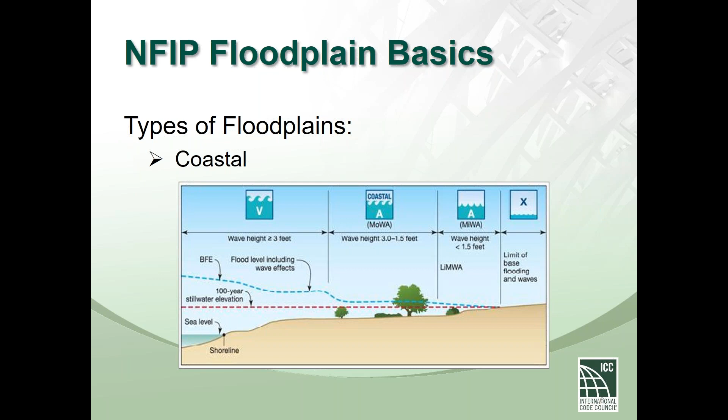Within each of the floodplains, there are different types of flood zones. The common flood zone is X, which means it is not susceptible to, or it is not expected to flood within the 1% in 100 years.

X, however, does not mean that it will not flood. With the storms that we have seen over the last few years, we have areas that historically never experienced flooding that in the wake of these storms did experience flooding.

The common areas that are anticipated to see floodwaters are the A zones and the V zones. The A zone is going to be most closely associated with the coastal areas. The water depths in an A zone can range anywhere from 0 to 36 inches deep. And then the coastal A, which is going to be along the coastline itself, traditionally the water depths are going to range between 18 and 36 inches.

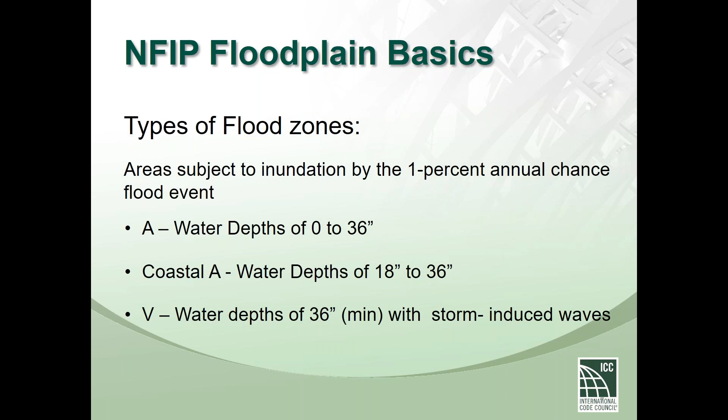On the coastal areas, however, once the water depth gets in excess of 36 inches, these are typically identified as V zones, and the V actually stands for velocity, meaning that as the water is coming in, it's basically surge. It's going to have velocity associated with it and energy, and it's going to do a substantial amount of damage.

The actual locations of these zones can be found on the flood insurance rate maps, or the FIRMs. The flood insurance rate maps are produced by FEMA and are made available online at no cost through FEMA's Map Center. You can simply go in, pull up your property address and identify the flood zones within your area.

Now, it is important to note that not every area within the U.S. has been mapped, whereas other areas have several iterations of maps. The greatest iteration having recently occurred was due to the change in the vertical datum.

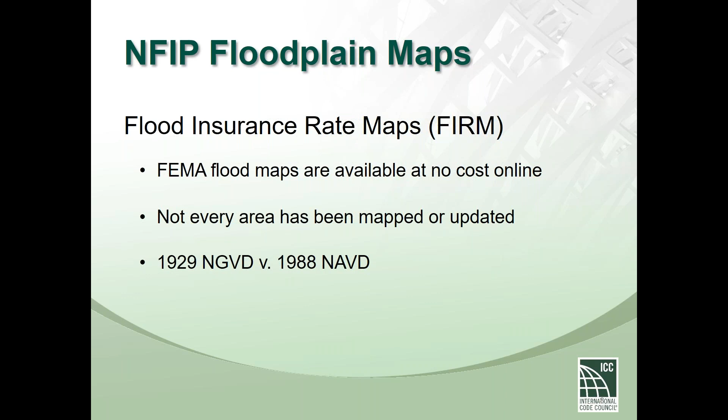When the maps were originally created in the late 70s and early 80s, they were based on the 1929 vertical datum. That datum, however, has been revised, and the maps are in the process of being revised, some of them for the second time or more. And the new vertical datum is based on the 1988 or the 1989 vertical datum.

On this slide, you see an example of a map that was created through FEMA's website. Simply by going into the Map Center, entering the address, you can pull up the location of the physical property. In this particular case, you see the location is in an area on the page that is white. That indicates that it is inside of an X flood zone.

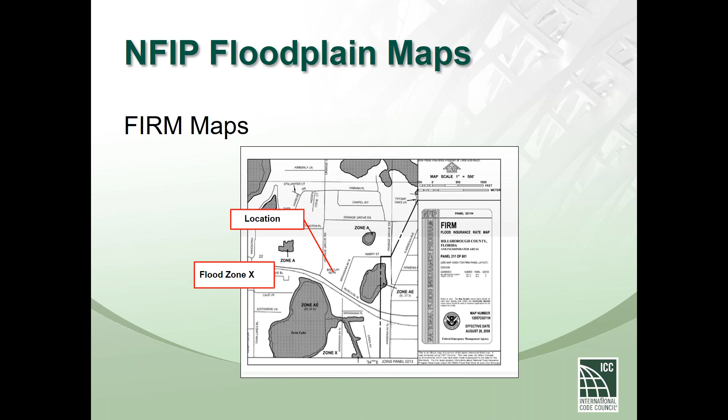And the dark shaded areas surrounding it are designated as either an A or an AE. The only difference between an A and an AE, the E standing for established, meaning that the depth of the flood waters have been established based on historical data and or hydrologic maps.

Now, one of the more important components of this is the vertical datum. The elevation certificate form that this slide talks about is a form that was created so as to capture basic elevation information, especially on structures within the flood zone, so as to establish whether that structure is subject to flooding or not.

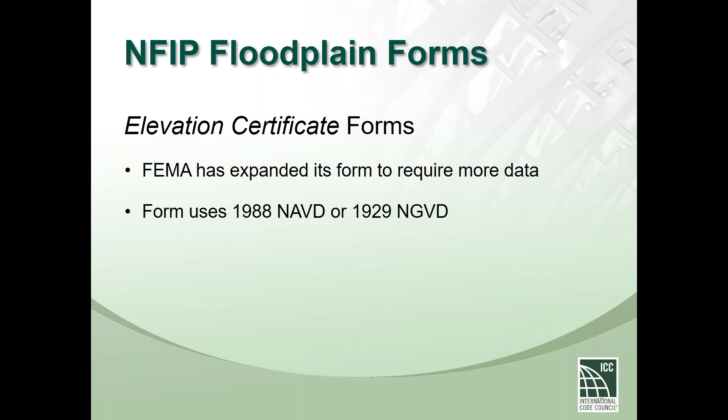The form has been expanded over time, and when navigating the form, it is actually very important to know whether you are on the 1929 or the 1988 vertical datum.

On this slide, you see a screenshot of the form itself, and just to point out a couple of areas worth noting, in the upper right-hand corner, you see that the horizontal datum information is found and is to be provided on the form. There were also two horizontal datums established, so it's important to know which one you're using there.

This has perhaps less to do with the likelihood of flooding and is used by many jurisdictions when establishing or verifying tie-in at the time the foundation is being placed. Below that is where you see the vertical datum information that is to be provided, with an indication as to which vertical datum it's based on.

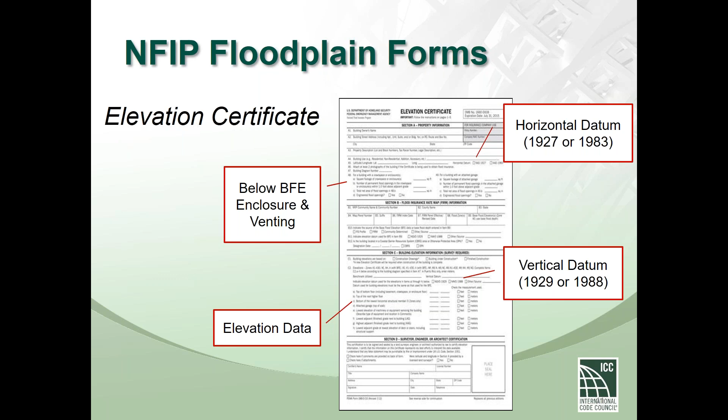On the upper left-hand corner, there is information on this form that is to be entered with respect to structures, enclosures, and venting of any enclosures that fall below the base flood elevation. And then finally down below is elevation data, with respect to different features and aspects of the structure.

Now, floodplain management has been around for a while, and historically, floodplain management was enforced through ordinances, modeled after the National Flood Insurance Program.

Floodplain management, however, is more than just buildings. Floodplain management is the management of construction and construction activities within the floodplains. Basically, anytime we build in a floodplain or add something to it, the water depths could potentially be increased as a result of that space being occupied. So floodplain management is just managing the growth.

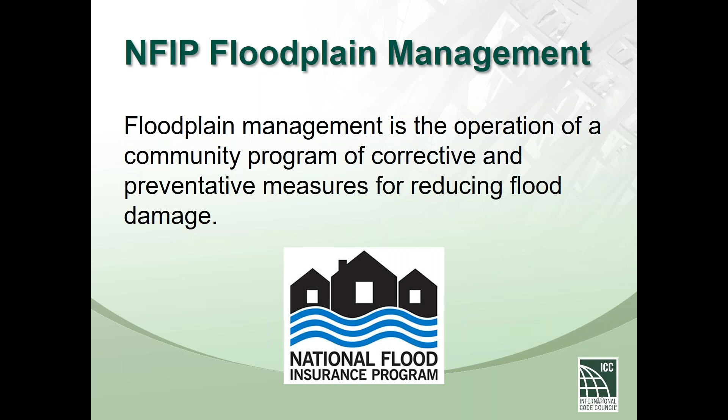Now, what happened is, as part of floodplain management, there were development concerns and building concerns. Starting with the 2003 and 2006 International Building Codes, the building provisions from the NFIP, the National Flood Insurance Program, were moved into the building codes. Initially they were put in the appendices, and then starting with the 2009 and 2012 codes, they were moved into the body of the code itself.

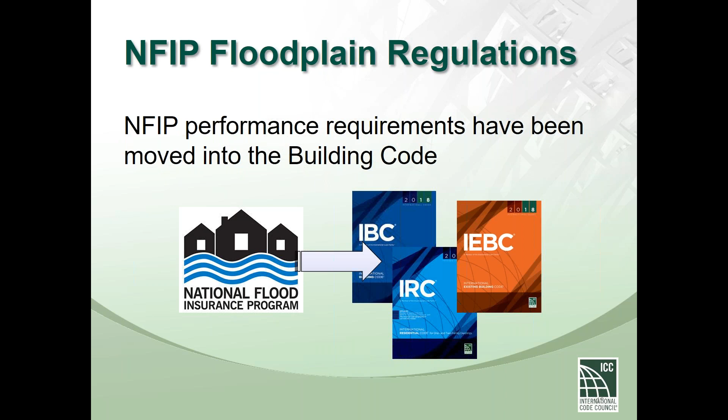In addition to the building requirements having been moved from the NFIP into the building codes, we also have additional requirements found within ASCE 24. I'll talk about ASCE 24 in more detail later in the talk, but basically the building code sets the prescriptive requirements, and ASCE 24 provides the methods with which one accomplishes those requirements.

Now, getting into some of the provisions found within the building codes and ASCE 24, we'll start with some terms that were introduced into the building code by the addition of the building requirements from the NFIP. One of the first terms critical to this entire program is the BFE, or base flood elevation. Simply put, the base flood elevation is the depth that the waters within the flood zone are anticipated to rise to.

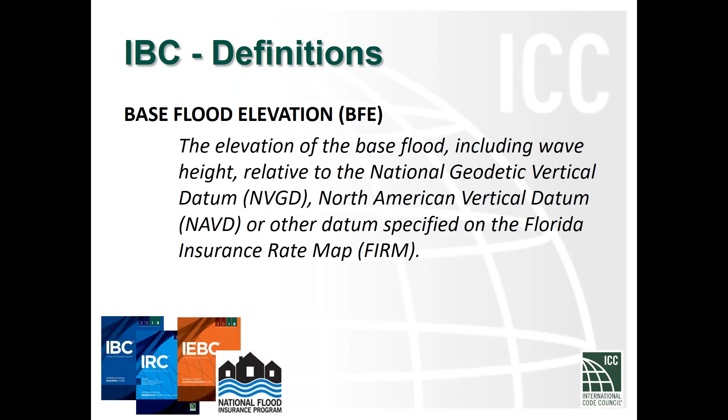As I said, this is based on historical information and hydrological models. The base flood elevation is also the minimum elevation, so anything below the BFE within a flood zone is anticipated to flood.

In addition to the BFE, we have the DFE, or the design flood elevation. The design flood elevation is the elevation that, when building new, we are to build to. So the difference between the base flood elevation and the design flood elevation is something called freeboard, the additional height we are to add to the base flood elevation. So if I'm designing a structure in an area with a base flood elevation of 10, and my code or municipality requires a freeboard of 2 feet, then the finished floor elevation is to be built to 12.

So base flood is, if you will, the elevation that the water is to rise to, and the design flood is the elevation that I am to build to.

One item worth noting: in the International Building Code, that freeboard I just referenced points to ASCE 24, because within ASCE 24 you have tables that provide values based on the type of structure and where it's located, specifying just how much freeboard will be required.

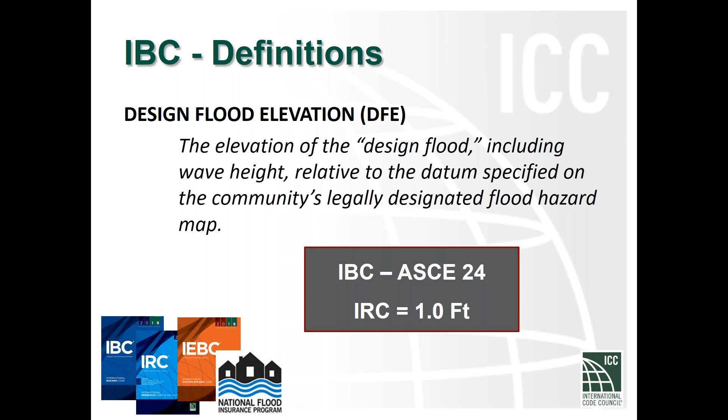Whereas in the International Residential Code, that freeboard requirement has been set to 1 foot. Now, some municipalities actually require more than 1 foot, which has created some challenges. To the design professional, it's always worth noting that you need to check with the authority having jurisdiction to establish or verify what the freeboard requirements are.

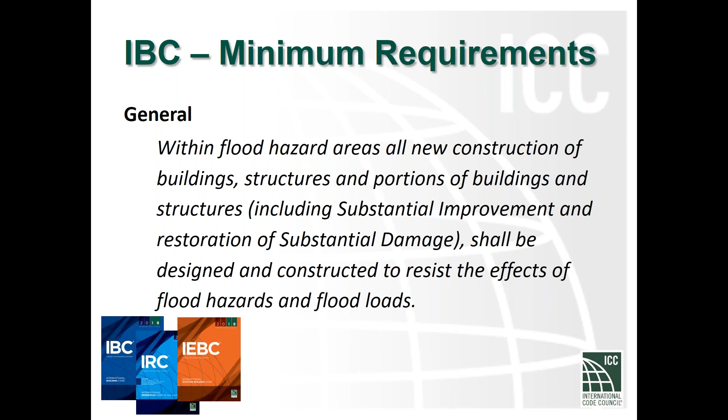Now, one of the other items we're going to talk about, one of the more significant additions made to the building code with the introduction of the NFIP requirements, is the dealing with existing buildings, or the substantial improvement, substantial damage rule. We'll talk about that in just a second.

Flood hazard documentation. In addition to terms that were added, there were additional requirements put into the code, requirements placed on design professionals, basically setting minimum amounts or types of information that the design professional is to include in their permits or plans, so as to demonstrate that the design has contemplated and met these flood requirements.

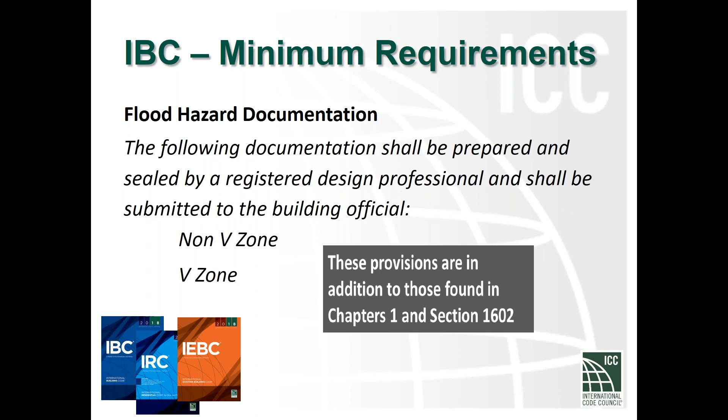Within the code itself, you'll see these requirements referred to as V-zone requirements and non-V-zone requirements. At the end of this first part of the talk we'll discuss some of the differences, but in a V-zone requirement, that is in the coastal area where I'm going to see surge and the depth of water is going to exceed 36 inches. The non-V zone could be anything from a coastal A to an inland A, and the water might be rising only on the order of inches. There are differences, and the code differentiates between the two.

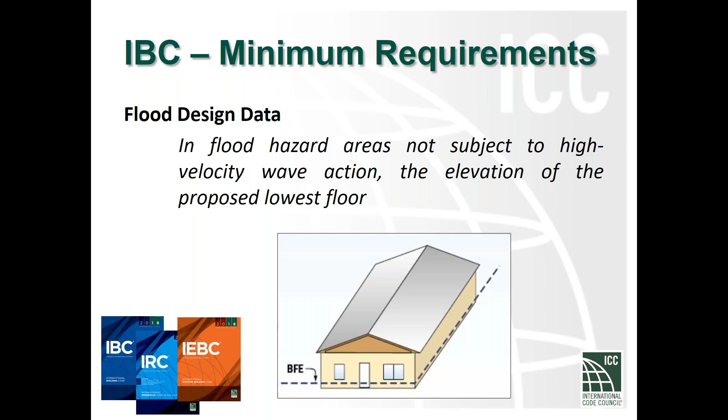An example, with respect to additional information to be provided on the plans by the design professional: if I am dealing with a structure in a flood zone, in an inland A for example, my requirement is that my finished floor be at or above the design flood elevation. So on my plans, I need to provide the ground elevation, the depth of the A zone, and then the elevation of the floor slab itself.

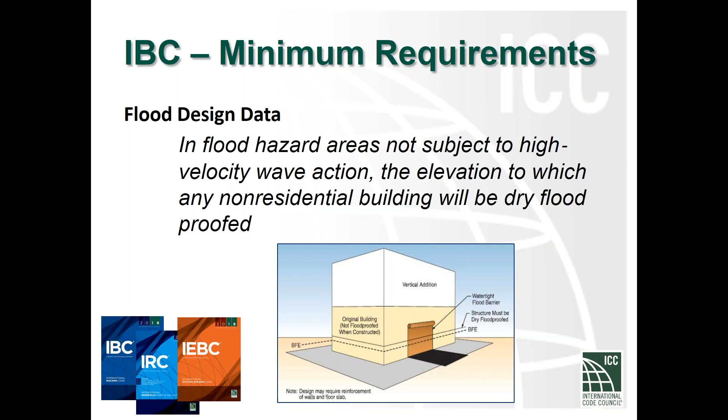If I have an existing building, I can dry flood proof it, meaning keeping the water out. There are requirements that have to be met with respect to hydrostatic loads on the method I'm using to keep the water out, and measures that have to be taken to anchor the structure against any floating. This information has to be provided in the plans and permits submitted to the authority having jurisdiction.

And then finally, an example of information that has to be provided when dealing with a structure in a V zone. V zones being very different. With the A zone, the object is to get the finished floor above the anticipated elevation of the floodwater, whereas in a V zone, the goal is to get not only the surface of my finished floor, but all of my horizontal structural components up and out of the water, so that when the surge comes in, it is not impacting any horizontal structural members.

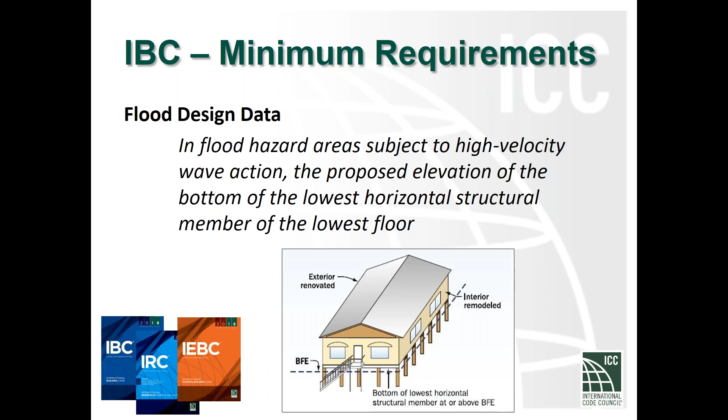So in this particular case, when dealing with a structure in a V zone, the information that has to be provided on the plans would include not only the ground elevation and the depth according to the flood zone maps of the water, but the elevation of the bottom of the lowest horizontal structural member, so as to verify that all of these components are up and out of harm's way.

Moving on, I said we would come back to this one, more specifically with respect to this talk, and you're going to hear a lot more about this type of structure from both Rod and Tom. But to introduce how the code handles it: when we have an existing structure found in a floodplain and the finished floor elevation is below the base flood elevation, meaning it is subject to flooding, when that structure is damaged or improved for whatever reason, whether fire, wind, or flood, when that property owner is considering repairing or improving that structure...

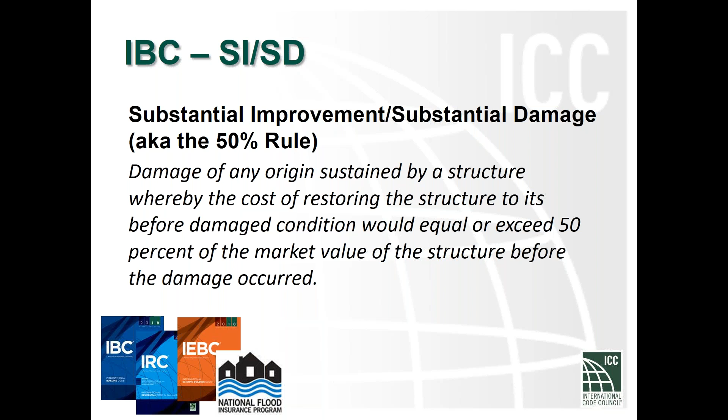...if the cost of those repairs or improvements exceeds 50% of the value of the building, then you have what's called a substantial improvement or substantial damage. The significance being, once that level of improvement or repair to damage has been committed to, that structure is required to comply with the flood provisions of the building code, meaning the finished floor has to be elevated to the DFE, or design flood elevation.

Now, there are some basic steps, and what you see on this slide is a flow chart of those questions I just ran through. Just to use this flow chart, when determining if my structure needs to be elevated or lifted, the first question is the cost of the repair or the improvement: does that exceed 50% of the value of just the building, not including the land, but just the building itself?

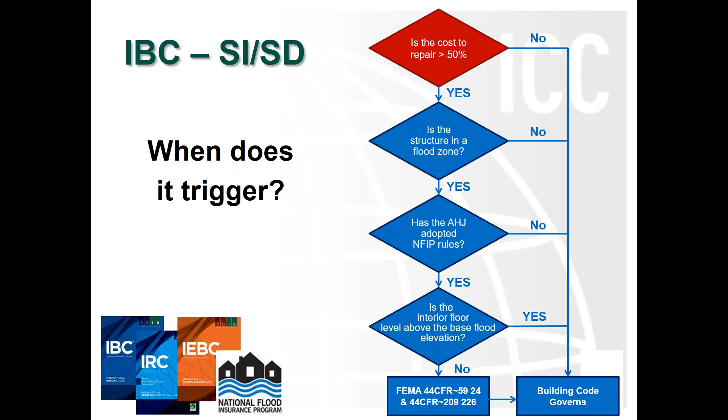If it does, is that structure in a flood zone? If it is, has the authority having jurisdiction adopted floodplain regulations and or the building code that would require an evaluation for substantial damage, substantial improvement? And then finally, is the interior floor above or below the base flood elevation? If you get down through all of this and the answer is yes, then what you're facing is lifting or elevating that structure so as to bring it into compliance with the flood regulations.

Now, to emphasize, when I have a substantially damaged structure or a substantially improved structure, and I have to elevate that structure, what the code says is that I elevate that structure and bring it into compliance with the flood provisions, not the entire code. The point here being, you can take an existing structure and elevate it without having to bring every aspect of that existing structure into full compliance with current code.

When I have a structure that is non-firm compliant, meaning the finished floor elevation is below the base flood, but whatever I'm doing—improving or repairing—does not exceed 50% of the building's value, then I have what's called a non-SISD. In this case, the code does not require me to elevate that structure, but it does recommend that measures be taken to protect utilities and items that can be protected.

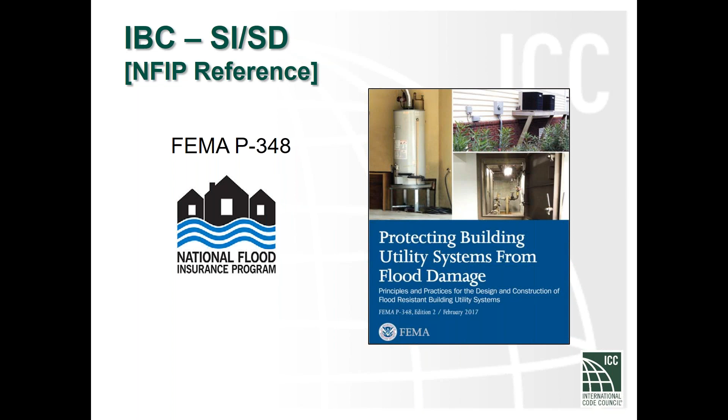Another example is FEMA P348. This is a guide put together on how to protect utilities, both through elevation and wet floodproofing means, so as to minimize or mitigate any future damages or the extent of any future damages.

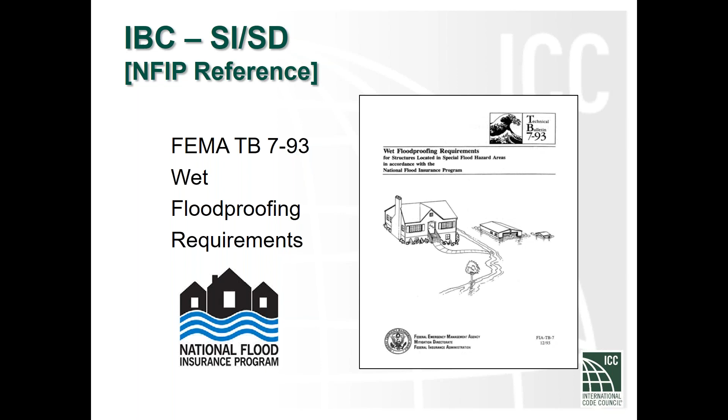And again, another example: this is FEMA's Technical Bulletin 7, produced originally in '93, that provides guidance on how to wet floodproof a structure. What wet floodproofing means is we're going to allow the water to come in, but we're going to protect those portions of the structure or those utilities within the structure from damage.

Without getting into a great deal of detail, ASCE 24 is the guide that the building code points to and directs design professionals to on how to complete, design, or comply with the requirements found in the building code. Within ASCE 24, you'll find tables providing basic freeboard requirements, how to design breakaway walls, how to design foundations, and the like.

So some examples, and I'll wrap up with this—just some examples taken from both the code and ASCE 24, also highlighting some differences between A-zone construction and V-zone construction.

Starting with A-zone construction: if I'm building a structure within an A-zone, what the code requires is that I have my interior finished floor elevation at or above the design flood elevation. The design flood elevation is based on the base flood elevation for that area, plus whatever the freeboard requirements are. Here, within an A zone, ASCE table 2-1 provides the various freeboard requirements recommended by ASCE.

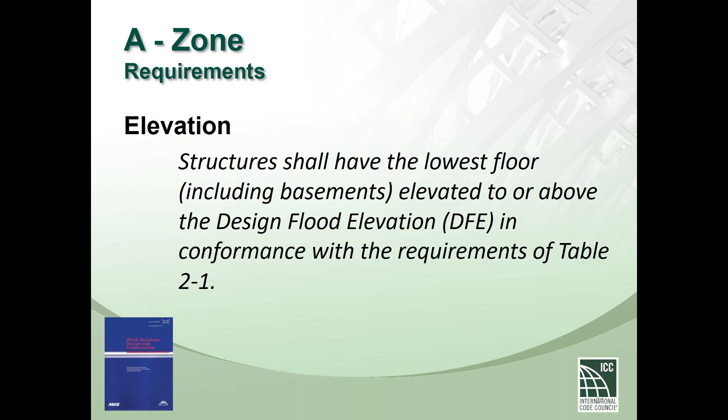Some other examples: within an A zone, structural fill is permitted, but is limited to the building footprint. That means I can build a structure on grade, bringing in fill soils to build on grade in an A zone. Some requirements are attached, such as the bottom of my footing needing to be below any estimated scour that may occur, but I am permitted to do that. The fill is limited to the footprint of the building, and the thinking is that we want to minimize the impact on the floodplain, thereby reducing the amount of further elevation of the water as a result of us occupying that space.

In addition, any enclosure below the design flood elevation is required to have flood openings, and you're going to hear more about that from Tom. Here's an example, and Tom will give you some great pictorial examples.

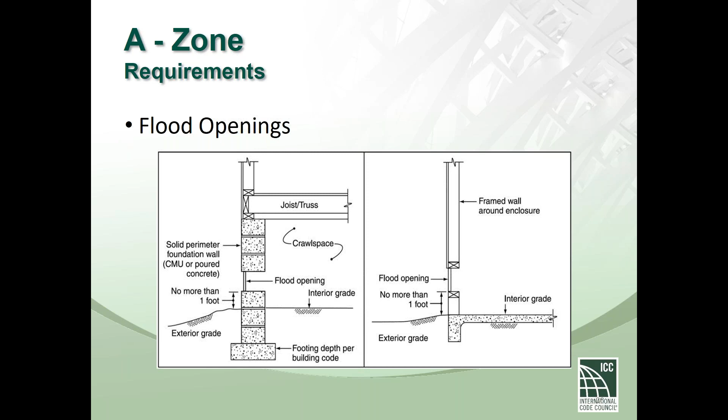On the left, you see a crawl space with a vented opening. There are requirements on the size, location, and how these openings are to perform. Basically, the code says if you're going to build a structure, the water has to be able to flow freely in, around, and through the footprint of that building without damaging it. On the right, you see an example of a garage floor slab that is below the design flood elevation, therein requiring that it be vented as well.

And then finally, to wrap up with, by way of comparison, in the V zones. In a V zone, as I said earlier, our concern is not the finished floor elevation. Our concern is the horizontal structural members, and we want all of them up and out of the water. So we take the estimated flood depth, add the freeboard requirement, and that is where we begin building up from.

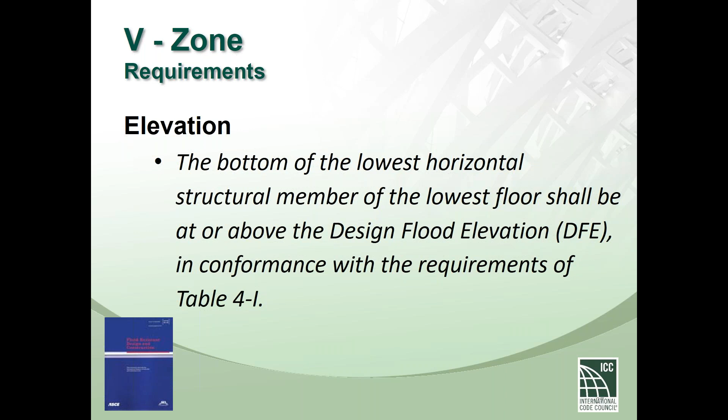In V zones, because we're going to have water coming in, and it's anticipated we'll see scour and erosion of the soils, structural fill is prohibited. In fact, only piled foundations, deeper piled foundations, are permitted. That way, when the water comes in and washes back out, pulling the soils with it, it should not affect the structure, thereby leaving the structure standing.

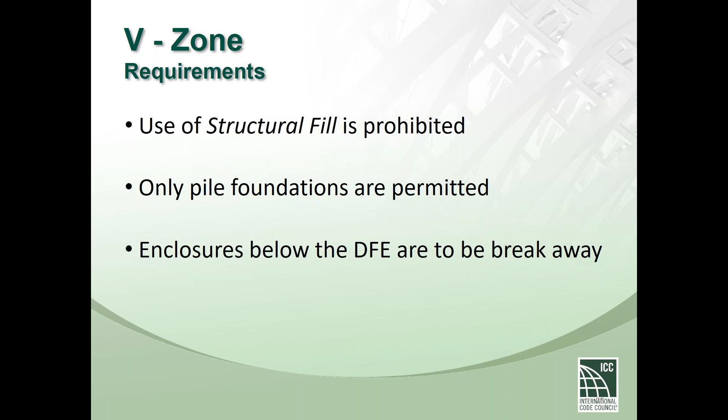But because we're going to have these floodwaters coming in underneath the structure, any walls down below my horizontal structural members are required to be breakaway. And any slabs on grade are required to be friable, meaning that they can break up and fall away without causing any damage to the structure.

So I submit that to you as an introduction of the floodplain, the rules, what's in the code, and ASCE 24. And at this point, I will give it back to Kelly so that we can continue on.

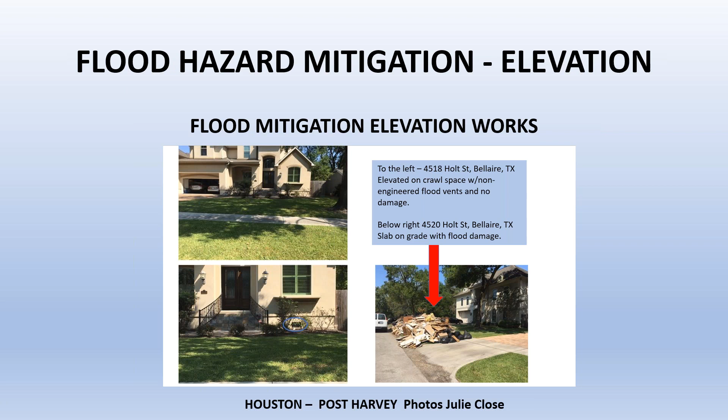So it's something we can stop, break the cycle of repeated flooding, and that's what this is all about. So elevation works. It works on so many different levels. Just released at the end of last year, they've upped the ante on the savings for flood mitigation. Now it saves $6 for every dollar spent in disaster recovery costs.

It also preserves property resale values. Elevated structures in the flood zone have excellent resale values, which is very important because resale values correspond to tax revenues, which keep everything running in our communities. Remember, 50 cents out of every property tax dollar goes to local schools, and the rest is spread out amongst public safety, sewers, roads, and as we are required to do more resiliency activities with elevating roads and helping make the stormwater and sewer systems and water systems resilient, you are going to need a strong tax revenue base. In Texas, like Florida, this is very important because there's no income tax, everything runs off of property taxes.

So very important to do that. Non-elevated structures with increasing flood insurance are losing value every year. It also greatly reduces the solid waste stream to the landfill from both demolition and disaster debris removal.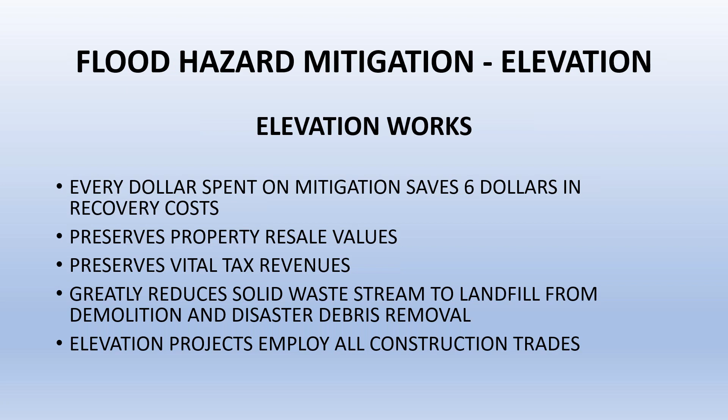All right, let's look at the equipment that we use. We have some very specialized equipment and some very highly trained personnel in our very specialized industry.

This is a unified hydraulic jacking system. It's recommended to be used on all elevation projects except for garages and sheds. This machine is an evolution of over 50 years of product development. It's built like a tank—you basically just overhaul it every so often, and it works for 50, 60, 80 years. There's not a lot of built-in obsolescence. So basically it's about $100K investment into the machine.

Then we have hydraulic hoses, jacks, cribbing, steel, tools. You see 2 crew trucks right here with trailers. By the time we show up to the property owner's front door, it's about 250 grand invested in crew, equipment, and insurance. So it is a very capital intensive investment, and very labor intensive work. We're very proud of the people in our industry and of our safety records. This is some very specialized equipment.

What this does is create a simultaneous lift. Each one of those dial gauges is a port on the machine, going out with a big hydraulic hose to a jack. They set all the weights—you can have different weights on the building, a fireplace at one end and a wood frame addition on the other—and you can lift the whole structure simultaneously by unifying all of those jacks in a single handle push, actuating all of the jacks simultaneously.

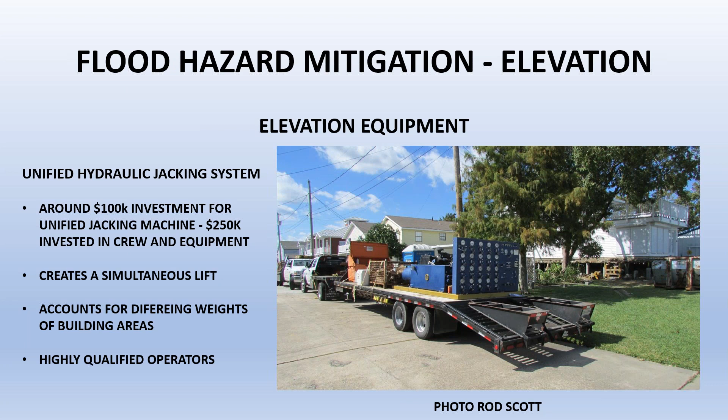It is the least aggressive method on a structure. Remember, no structure was ever built to be elevated or relocated other than manufactured housing. So we do occasionally get stress cracks above doorways and window jambs, but it really limits the damage compared to individual jacking of structures. We really appreciate this specialized equipment.

Here's our lifting steel—very thick flanged steel beams with very little deflection. Then we have the wood cribbing, basically the shoring—imagine Jenga blocks, that social game we used to play. We stack those underneath the structure in either direction until we get up to the bottom of the structure.

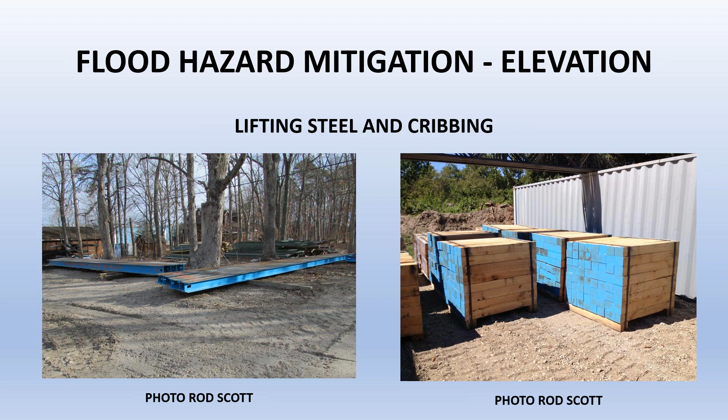We place the jacks inside the wood cribbing, which you see on the right-hand picture, and put that blue jack head right up against the steel that's going to be lifted. The cribbing supports the jack with that aluminum base you see on the left-hand picture, and that's a 15-ton ram. We can have as many as 20 or 30 of those 15-ton rams under a slab elevation. We push the lever and it goes up in the air.

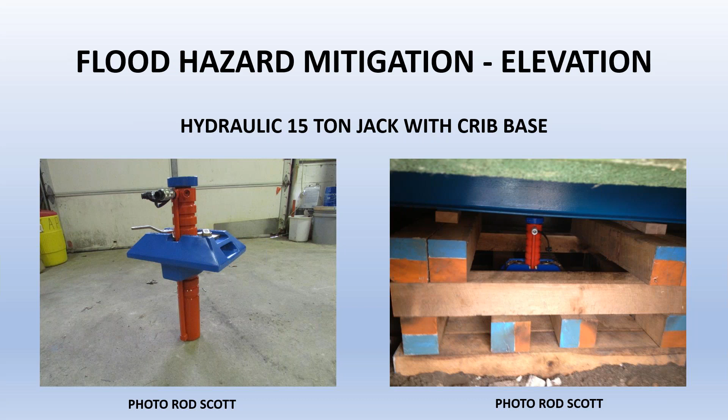It's really an amazing process to watch a slab such as the one on the right here, which was a 4,000 square foot home with 1-inch marble floors and about a 4-foot grade beam. This is a structural slab on pilings.

So what we do is go in and drive segmented block pilings down into the soil until we hit refusal. Then we embed those pilings, along with the original wood pilings, all into a new grade beam footing, and then bring up—in this case—a CMU block wall, chip off that rough texture, stucco everything, and you'll have a beautiful new elevated home, safe from flooding.

On the left-hand side, you see the lifting crib assemblies where the jacks are inside. In addition, we can use the jacks on the pilings—once those piles hit refusal, we can actually lift off of those piles as well, as shown in the left-hand photograph.

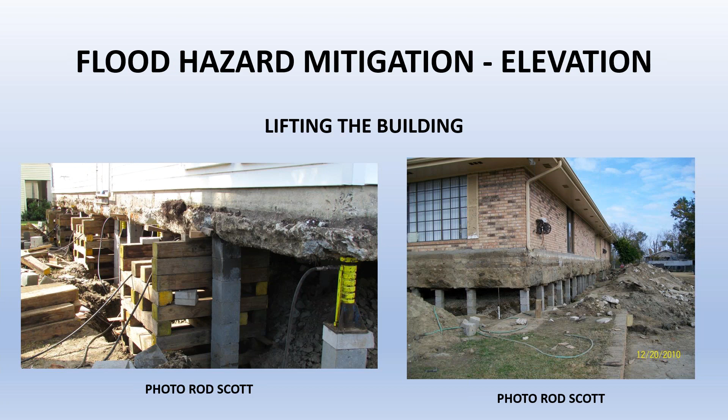We have a lot of requirements and regulations in the floodplain. We really respect the work of our professional engineers, structural engineers, and architects that have to interpret and interpolate all of the intersections of the flood insurance program, the engineering requirements, the code requirements. Luckily, as we go forward with ASCE 24-14, the newest version of the codes, the 2015 codes incorporate a lot of the NFIP and engineering requirements.

So it is getting a little easier. It's not 3 distinctly different documents anymore. But this is not an easy environment. It's filled with hazards. Water has debris in it, and we have to build for the future for flood events, and that requires heavy-duty foundations. I call them battleship foundations.

So let's talk about the steps to elevation, because it's very important to understand that these are basically construction projects in scope of work, except for the elevation and the resetting of the structure onto the new or added-to foundation.

So when we talk about these steps, number 1 is the elevation certificate. It allows us to get a first blush image of where the ground elevation is, how high the flood minimum map elevation is. Of course, we never talk to people about elevating to the minimum flood map elevation. We always encourage a freeboard. Remember, every foot of freeboard enables an additional reduction in flood risk and flood insurance premiums. And if you're living near the coast, that ocean isn't going down, so it allows them more time to stay and more safety factor as the ocean comes up and the storms continue.

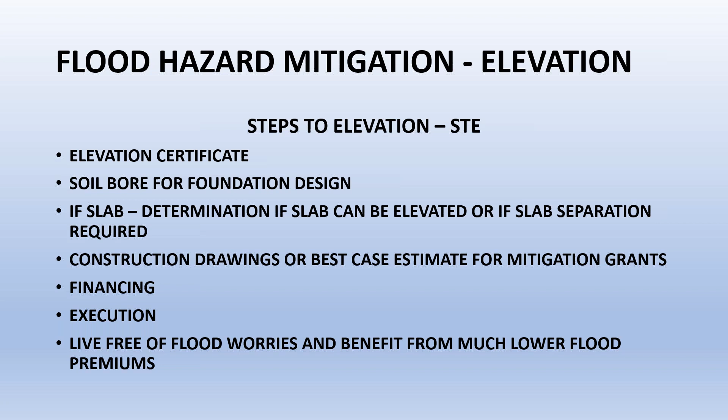And then we come back in, we do the construction drawings and get the accurate estimate for not only the actual grant funding, but the construction contracts. Then we look at financing, which we'll go over in our next segment. That can be a myriad of different sources of financing. We execute the project, permit and execute it, close it out, get a certificate of occupancy, and the property owners then can live free of flood worries and benefit from the much lower premiums and stabilized property and tax revenue values.

So let's talk about the NFIP real quick before we talk about financing, because this is a big topic now, and we feel it's really being underappreciated or misunderstood in communities. In many communities in this country, we have a very large number of pre-flood-map buildings that have been basically subsidized on almost free insurance for 40-some years of the program because they were built before a flood map. In the last 40 years, especially with the increase in storms over the last 10 or 15, the flood insurance program went into debt to the tune of billions of dollars, which our children are going to have to pay off.

So the free ride is over with the pre-flood map buildings. Those buildings are rising to their policy premiums rising to actuarial rates. And the blue line right there is basically 2 feet below the map level. And it's not going to be pretty in communities with high numbers of these buildings.

We really need to look at not rebuilding these pre-flood map buildings without a mitigation project, even if they're not substantially damaged, because the liability on the property owners is really not understood and appreciated at this point in their drive to get back to normal, even after 3 floods.

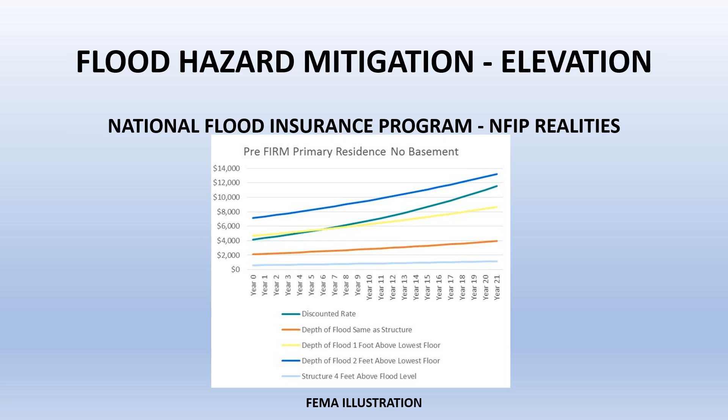Many of them now are severe repetitive loss, which is really devastating to the property owners without them knowing, because if they've had three big claims in 3 years and become an SRL, what we call an SRL, severe repetitive loss, their insurance premium increases go from 12% a year for primary residents to 25% a year. So instead of 14 years from now getting to that actuarial rate, in 5 or 6 years there'll be an actuarial rate, which is going to devastate neighborhoods with multiple flood events.

And their values, and we can fix this. We just need to look at pulling on our big boots and fixing this.

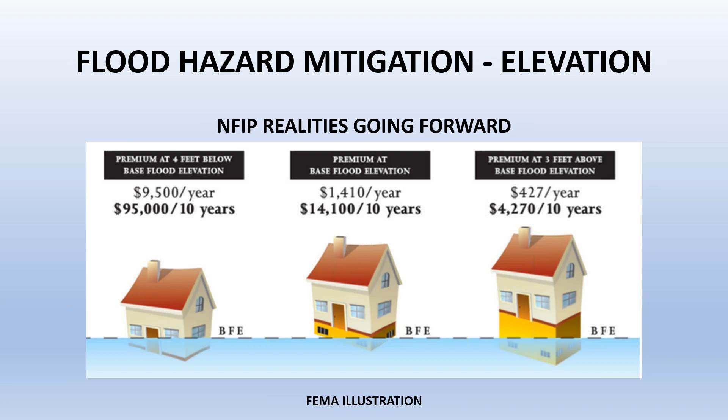Whereas if we go 3 feet above the BFE, above the bare minimum, as we call it in our industry, look at that cost savings that can actually be put towards paying an owner's share of the financing of these projects. Everybody's complaining about big 6-figure costs for slab elevations, but once we start talking about what these NFIP realities are going to be very shortly, we've got to get this fixed. It's a real big problem for our country.

So let's talk about the funding. Funding is really at the core of all of this. The costs are what they are. Our industry, after tens of thousands of these elevations, really has a good handle on the costs of these projects, and it is what it is.

So we've got to figure out how to fund this stuff. One of my favorite sayings is, in 2012 and 2014, Congress changed the NFIP rules but didn't provide us any financial tools. We do not have any sort of low interest, long-term financing for this type of activity, and it's really going to get painful quickly in the next 4 or 5 years. So we really need to figure out some other way to fund these, but these are the current funding mechanisms.

Equity or cash. Equity that you have in your property that you can borrow against, or cash that you can pull down out of stocks, bonds, things like that can help fund the project.

Cash is king, and of course on a cash project, the contractor usually gets paid much quicker than in grant-funded projects at certain stages, benchmarks on the project, and so the cost of the elevation tends to be a little lower because the contractors have to account for that longer term payout, because remember, we're paying for materials and labor as we go, and if it's 30, 60 days on payouts from grant programs, we have to cost account that into our accounting systems and keep our operations running.

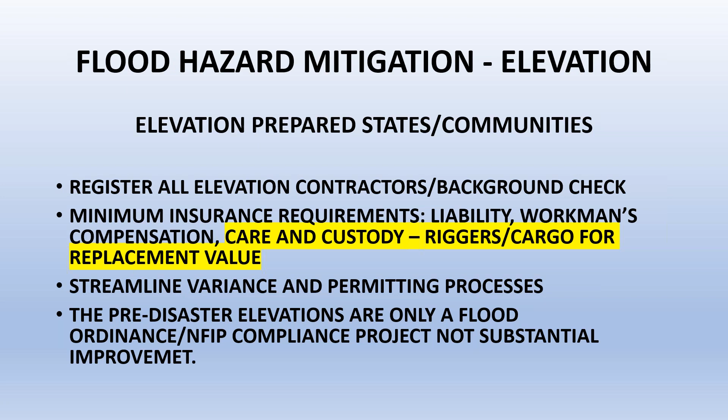I know I'm running short on time, so I'll finish up. This is our moonshot: 3 million of these buildings in this country, $1 trillion worth of construction we think over the next 20 years, or we've lost value in those structures. Many of them are in our core areas, close to central business districts. We've got to get these homes up, we've got to fix the commercial buildings. You guys sent people to the moon. Texas sent people to the moon in 10 years from deciding to start it. We've got to put on our big boots and do this, and you will have resilient communities that will withstand and respond quickly from future floods, which we know are going to happen.

Let's do it together. We're here to help you, and we even have contractors currently moving into the area based on contacts I've had with several of our industry leaders. Competition breeds good pricing, and we're going to need a lot of specialty contractors to get 40,000 to 50,000 buildings up off the ground. Thank you very much for your attention today to this program.

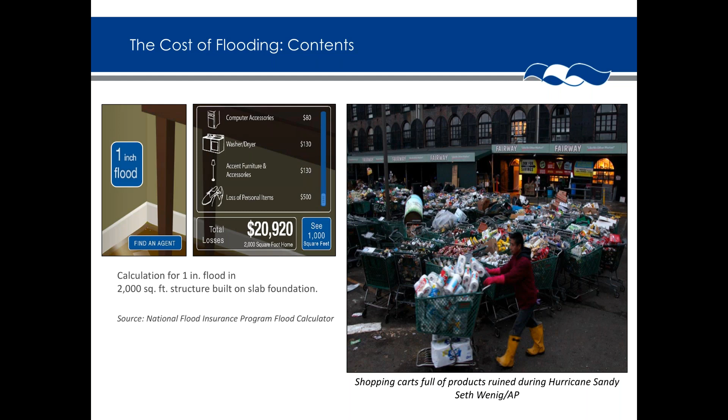We're focusing on residential applications within the flood areas, but it's important to note from a commercial standpoint, dry flood proofing commercial buildings. When we talk about recovery, here's a property affected by Hurricane Sandy. Those are shopping carts full of inventory for that supermarket. That inventory could have been used for recovery after the storm if they had hardened those walls, designed to take on structural load. We maybe just needed flood barriers or flood shields in front of these doors, windows, and other openings, and it would have protected that inventory. So from a commercial standpoint, dry flood proofing can make a big impact to make a building resilient.

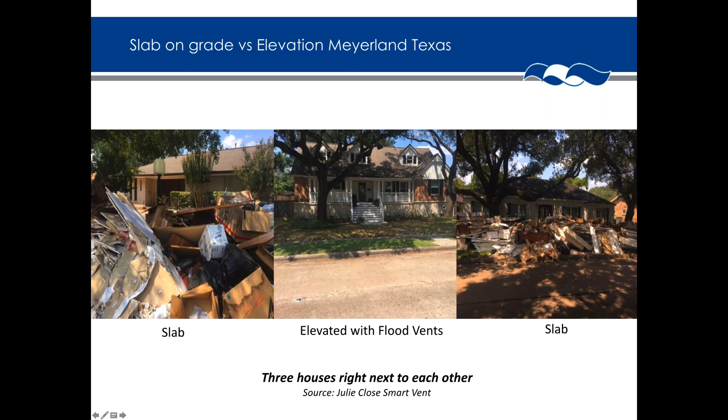This particular home was at the same elevation, which was -4 compared to the base flood elevation, as the house on the left and the house on the right. They elevated it after the tax day flood and the Memorial Day flood in that Houston area. Then when they were flooded during Harvey, it survived with no damage. So the big takeaway is that these elevation techniques really do work.

Now, Rod spoke to flood insurance premiums on the rise. They're going up drastically. We've been seeing this since 2012 with the Biggert-Waters Act going into effect. Since then, we've had the Homeowners Flood Insurance Affordability Act passed in 2014 that slowed down the phase-out of these subsidized rates.

The key thing, although affordability is in the HFIAA Act, it's very important to let our property owners know it's a Band-Aid. It's only slowing down those increases. Eventually, you will top out at your actuarial risk rating.

It's important to talk to your residents, your customers, your clients about what needs to be done if you have an existing structure. What's the first step to figure out how to lower my premium? FEMA, the NFIP, is sending out with the renewal letters a great flyer with some helpful graphics. Option 1, do nothing. Well, hope really isn't a strategy, so option 1's no good.

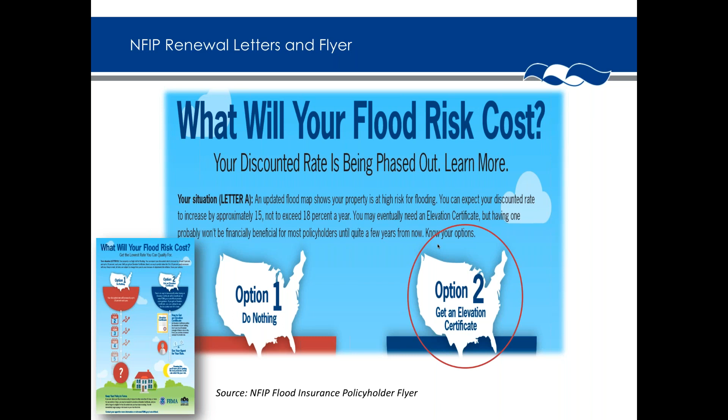What's option 2 say? Get an elevation certificate. Option 2 is what we're going with, and the elevation certificate plays a critical role. When we're speaking about what you can do to lower your flood insurance premium, get an elevation certificate.

Most homeowners don't know what you're talking about. So take a step back. How do we educate our residents on what's going on with the flood insurance premiums? How do we answer their questions one-on-one? We need to do those in the form of outreaches.

Our particular agency has done a lot of these since Hurricane Sandy, and they also contribute to CRS credits via Section 330, public outreach. It allows homeowners to get their questions answered for their particular situation, get their situation evaluated by an agent. So look into doing outreaches in your community. They can make a great impact. Plus you're getting credits, which are going to potentially help lower the flood insurance premiums for them anyway in the form of that CRS discount.

But the elevation certificate is step 1. You need this form to determine how high you're going to have to elevate. You need this form to determine what your actuarial risk rating is going to be.

There's a few problems we see on a daily basis with elevation certificates. One, the house is properly elevated, but there aren't proper flood vents. If we don't have proper flood vents in the enclosed space below the design flood elevation, the DFE, then we cannot exempt that space from flood insurance rating, meaning it's susceptible to potential flood damage due to the buildup of hydrostatic pressure. So the NFIP charges you a higher premium in those situations.

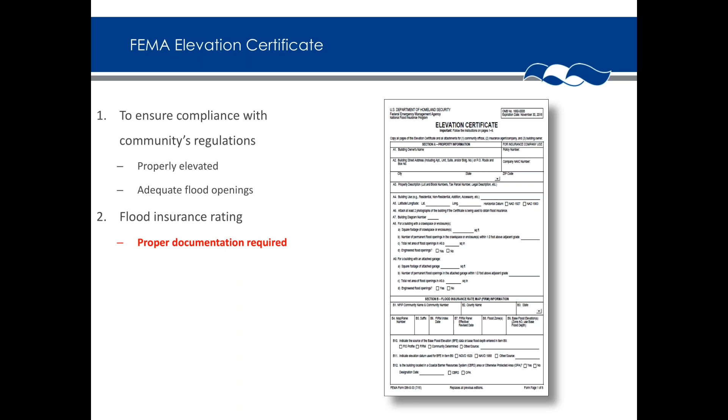So get rid of that myth in your community. The elevation certificate will only help, and it's the blueprint to know how high we have to elevate.

What steps can be done to lower your premium? On average, reasonable mitigation such as flood vents or filling in a subgrade space that is below the DFE will reduce a flood insurance premium on average about 70%, from the data we collect on an annual basis.

So it really helps. Let's talk about what we experienced in Texas and Harvey-affected communities, such as this Meyerland house. When we talk about elevation, we're talking about resilient structures.

Rod spoke to that. The building codes require you to elevate that first living floor above the BFE plus any freeboard, depending on your building code—2015 I-codes, 1 foot. I am so thrilled, and we got to give a shout out to Harris County for passing a new ordinance requiring 500-year elevations.

Jamila Johnson, floodplain manager for the city of Houston, and her team are working to get the city of Houston's ordinance up to speed. They too have language in there to elevate to the 500-year elevations. This is going to help.

Freeboard works. Here's a quick story. This particular house sitting on this lot, prior to this elevated house, was a slab-on-grade home. It went through previous storms—the Memorial Day flood, the tax day flood. It had proper flood vents in the crawl space. So what happened is the architect tore down the slab-on-grade house and built this beautiful house up on a crawl space, elevating the first floor with 1 foot of freeboard. That's important—1 foot of freeboard.

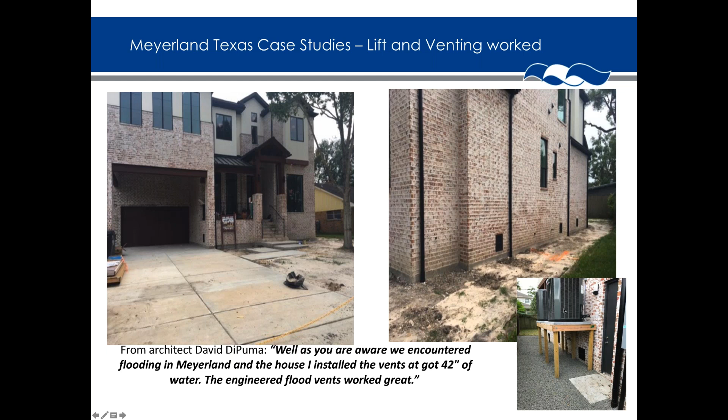It had proper flood vents—these were mechanically operated, engineered flood vents that were ICC Evaluation Service evaluated and had a report. Those are in the foundation to relieve hydrostatic pressure. We had our AC units up here on a platform above the DFE. So this house was properly wet floodproofed.

This house was hit by Harvey shortly after construction was completed. David DiPuma, the architect who designed this home, was getting ready to list it. He got a frantic call from his neighbors. They were in a big panic. They said, David, we need to get into your house next door—what's the key code on the door? So he gave it to them.

That family next door was in such a great panic because their home was taking on water. They needed to get their family out—they didn't evacuate in time. They literally took their children, put them on pool floats, floated them over onto this porch, and took refuge in this house for 2 full days. This picture was taken shortly after they got up on the porch, and floodwater came within this first step—within 6 inches of overtopping it, which would have run into the first living floor of the house. Freeboard worked.

Freeboard worked. So not only did this house survive the storm—freeboard did its job, the flood vents relieved the hydrostatic load on the foundation walls—but we saved lives. When we're talking about elevation, we're talking about saving lives.

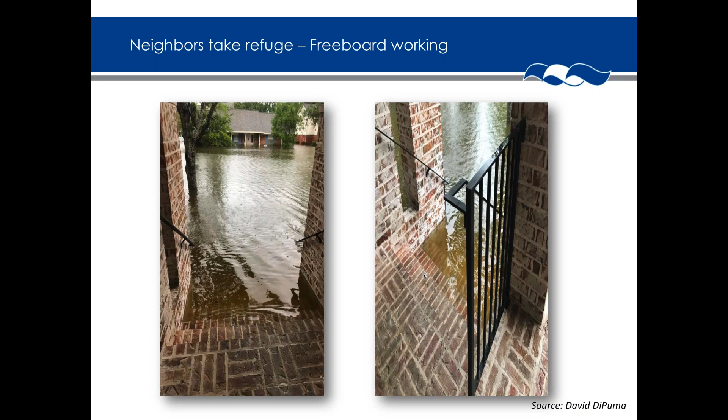When we're building back these homes that are slab on grade, Rod said it best—we really need to be thinking for the future. What can we do to protect these structures? How can we raise them up? And if we can't elevate them, what other methods can we utilize? There's no answers there yet, but we need to work towards it.

Shortly after the flood, David DiPuma was able to get the sod in and put this house up for sale. When we talk about a resilient structure, this also retains home values. He sold this house in less than a week, and he had this little sign in the back—you'll see this all around in Houston now. This house was not flooded. It sustained no damage. There were no claims to the NFIP.

Everything was structurally sound. We are documenting what's working—that's why our codes, standards, and regulations improve. Every 3 years the ICC puts out a new IRC and a new IBC. ASCE 24 was just recently updated in December of 2014. That's going through review right now, and will have a new release in the next year or two.

KHOU, the CBS affiliate, documented David DiPuma's story so others could learn. That's David right there, the architect, doing a report—this is the house behind him, where the family that took refuge in his house came from. He explained how they came through the fence out back on their pool floats to get their family safe and sound.

But here's the other added value: we talk about flood insurance costs.

Because that house was elevated 1 foot above the base flood elevation, it had proper flood vents to exempt that lower enclosed space. The premium for the property was $713 a year for full coverage. If that was 2 feet above the base flood elevation, it would be in the $618 range.

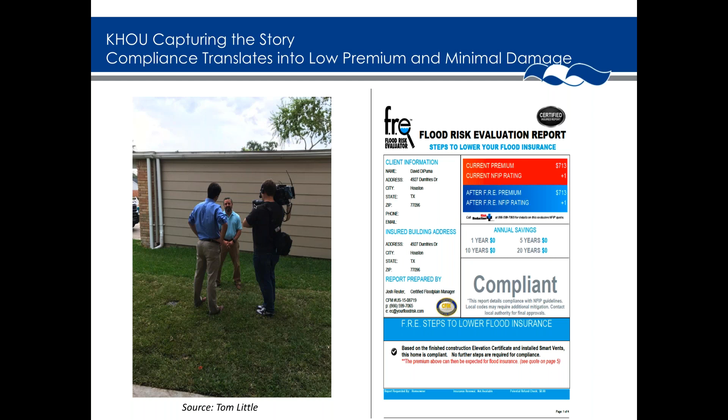That slab on grade house directly behind David DiPuma, when that hits its actuarial rate, it's a -4, it will be close to $10,000 a year for flood insurance. So financially, they're not going to be able to afford to stay in that home. We're going to have to do something.

So again, just to tie back the flood vents, because this is the number one red flag that we see, especially with newly elevated structures, whether it's taking an existing one and elevating it like Rod showed, or if it's new construction. What's the objective of a flood vent? Well, it's quite simple. It's to relieve pressure off of the foundation wall or supporting wall of any enclosed space below the design flood elevation.

So it's required in your crawl spaces, your full height enclosures. I spoke to the elevation certificate building diagram - those are your diagram 7s. But we're relieving hydrostatic pressure, lateral forces. When you have subgrade spaces, that's a big no-no in the floodplain.

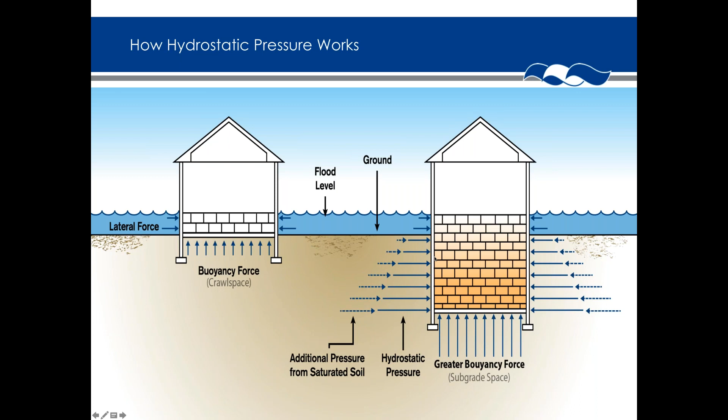Why? You're going to deal with saturated soil pressures. You're going to deal with greater buoyancy forces. And in those situations, that's when we're typically filling in that space to create a non-subgrade space. You're abandoning that lower enclosed space to maybe create a crawl space, but you're going to drastically lower your flood insurance premium. So here's the visual aids.

I think enough is said really by just looking at these pictures, but lateral forces build up on a wall. If you don't have proper flood vents, the wall can collapse. You can have significant structural damage. One of the characteristics of a compliant flood vent is it needs to allow water to enter and exit.

So you see these blocks on the outside? Maybe there were flood vents in this, maybe there weren't, but the water came out quicker than what the wall could equalize the load, and that's why those blocks are on the outside. So bidirectional equalization is critical.

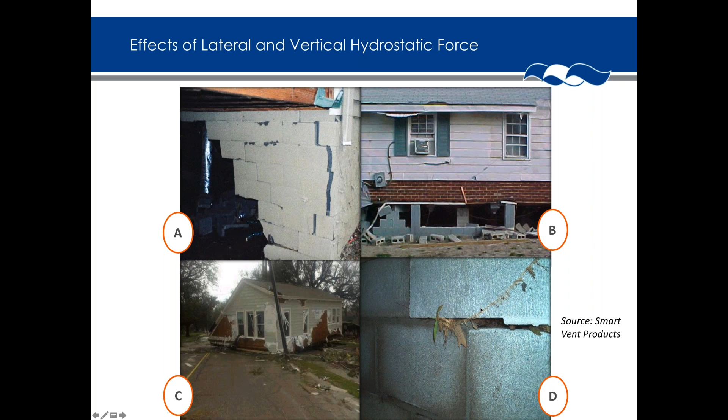Buoyancy forces - when flood water hits the superstructure, that's when that house can float. The block shearing here, what's an important takeaway is there's debris in flood water. It can clog a flood vent if the vent is not designed to mechanically open, like we see over here on the right-hand side. So wet flood proofing is key.

One of the key documents with regards to flood vents is FEMA Technical Bulletin 1 from August of 2008. They give you all the details of flood vents, how many you need, the enclosed spaces that need them, different types, non-engineered versus engineered. It's important.

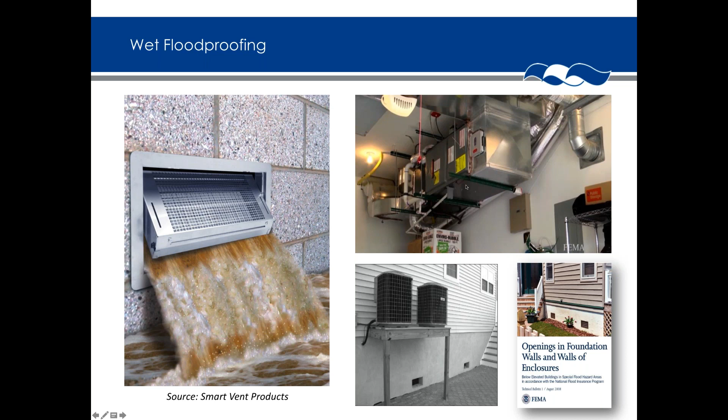Get your AC units up on platforms above the DFE. Hang your air handler from the ceilings. But with regards to equalization, it's quite simple. And performance is part of the ASCE 24 requirements and the International Code Council Evaluation Service acceptance criteria for mechanically operated flood vents.

And those state that you cannot have a 1 foot differential at any time during a flood between the exterior and interior flood levels. So no more than 1 foot. So this would be a failure on the left-hand side. Maybe this was a non-engineered vent, maybe it was clogged with debris, maybe there weren't enough openings.

This can also lead to storage capacity issues. Now, floodwater - even if the wall doesn't give way, water is not able to fill that space and be stored in the crawl space, so it can increase your flood levels. And maybe that takes floodwater from not being in your living floor to being in your living floor.

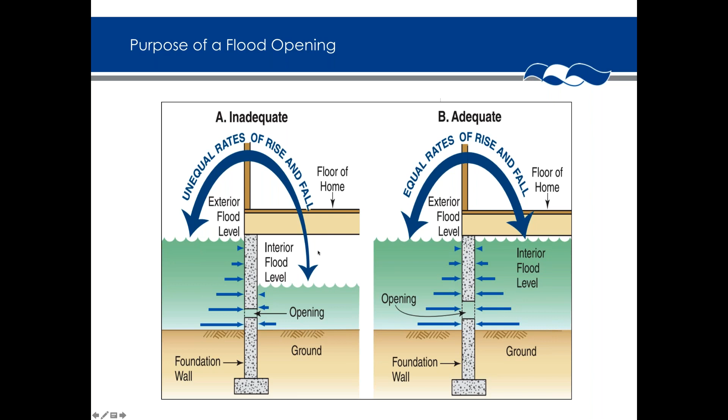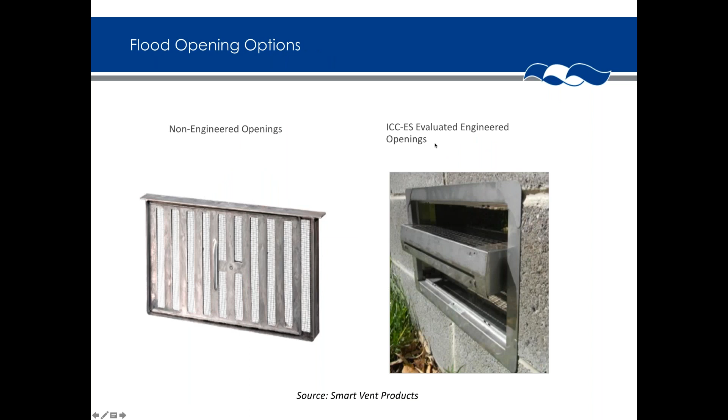So what are we looking for? Perfect equalization like we saw on the right-hand side. 2 different types of flood openings: non-engineered openings, and then there are ICC-ES evaluated engineered openings, and then there's unique project-specific engineered openings, but we're just going to hit on mass-produced engineered flood openings that are on the marketplace.

We'll start with non-engineered openings. These are devices, by definition, not designed as a flood opening, right? Non-engineered, not designed. And when you use non-engineered openings, there's going to be permanent obstructions to flow, and at least the minimum with regards to the code, a screen, because you just can't have an open hole in your foundation. You'd have rodent potential issues there, right? So when you're using a non-engineered opening, you need 1 square inch of net open area for every 1 square foot of enclosed area.

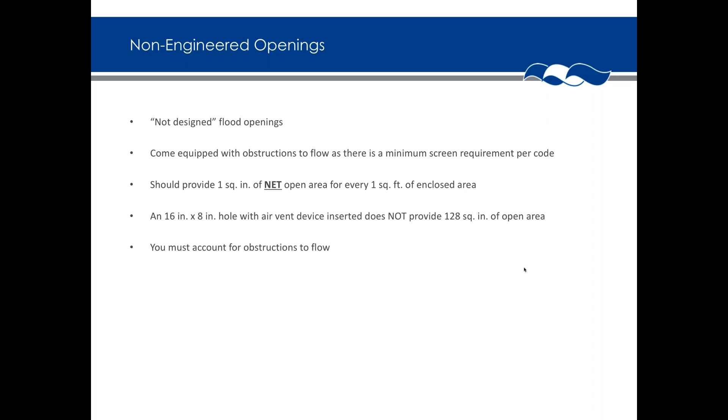So just think 1 for 1. What's important is a 16 by 8 inch hole with an air vent device inserted in it does not measure 128 square inches. You must account for the obstructions to flow.

Here's a vent seen in the Gulf Coast, made out of concrete. It's got a permanent fixed screen, you can't pry that off of that vent. But 16 by 8, or 15.5 by 7.5 which this measures, does not measure 116 square inches. You account for these obstructions, all this area. You can only count what's

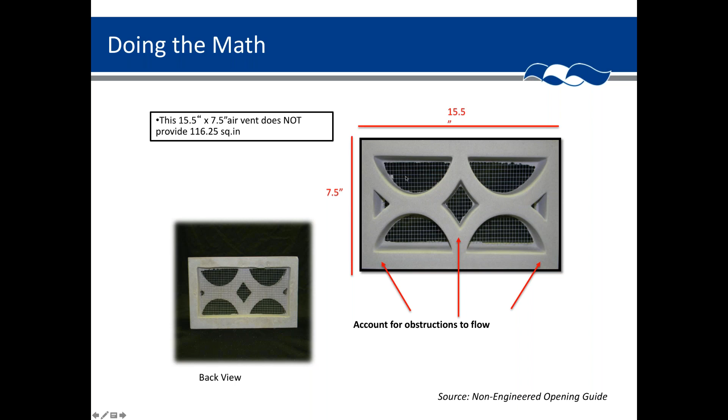free of any obstruction. Now granted, there's a screen, and in many of the building codes, those screens can clog almost up to 50% of any of the net open area. So just something to be careful of. This vent, when it measures out and you only count the net open area, it covers 32 square inches of net free area.

So again, we're back in that Houston area. We have a house that was elevated. It has that vent in the foundation. Now granted, in this particular case, there was no structural damage due to pressure. The house next door, slab on grade, there you go, another debris pile. But in this particular house, if it was a 2,000 square foot crawl space, that house would need 63 of these vents around the perimeter of the foundation to comply to the non-engineered opening requirements. I can tell you there were not 63 of those vents in that foundation.

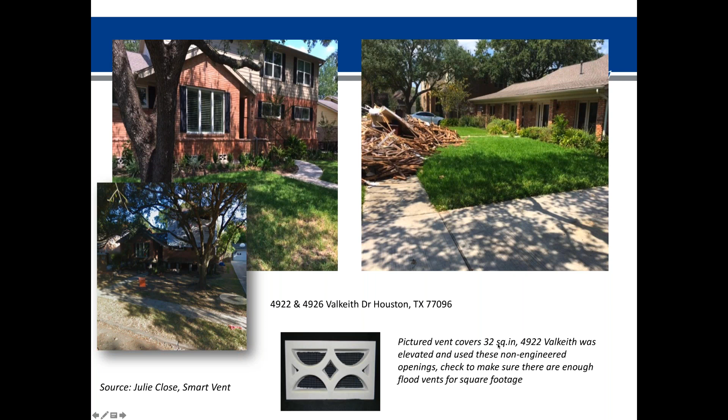So if there was an adjuster coming out and they identified lack of venting, it would increase the premium as it made it back to underwriting. So just be aware, even if the property has a CO, and you see the surveyor maybe measured this vent, because they're going to give you pictures with the EC, and they measure it at 128 or 115. If it's anything but 32 square inches, you want to throw up the red flag and check in on that.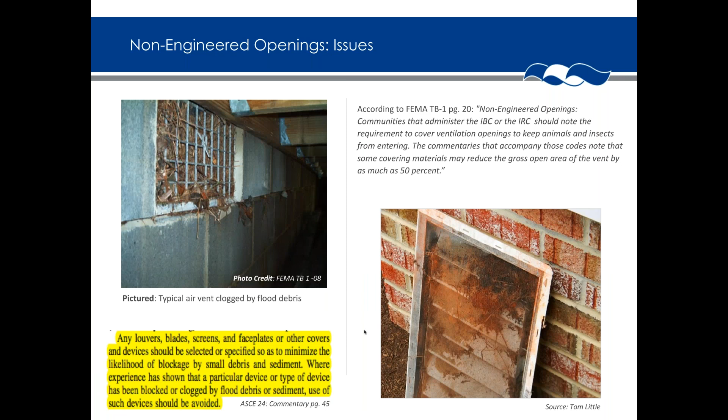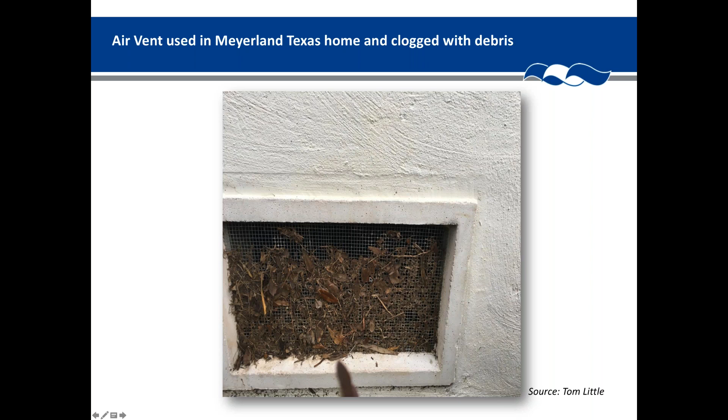These air vents clog with debris. I think we got that point across. You need to be careful with them. We've seen it in Meyerland. The ASCE 24 has requirements, great commentary to their standards that state if the device is known to clog with debris, avoid using it. This is what we've seen all across the country. This is an open hole with a screen on it, and you can see how it collected debris. That was in the Harvey area as well.

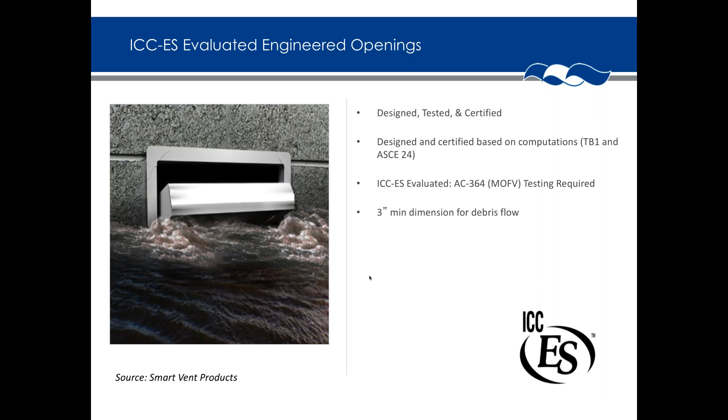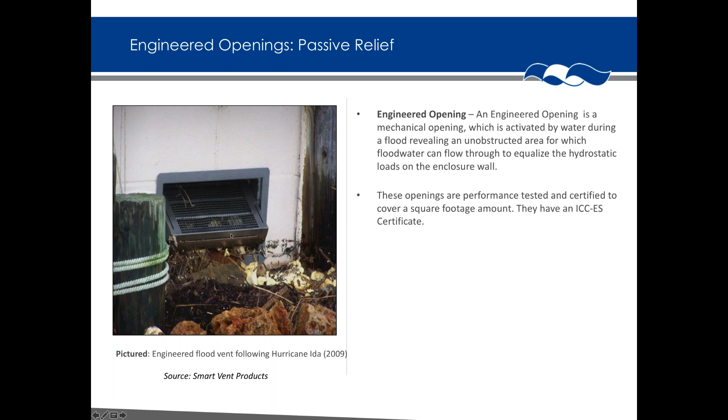But the basis of the operation, there's little floats in this particular device's design. Those floats lift with buoyancy. So normally it's locked in the closed position, doesn't operate like a doggy door, rodent resistant, remember. But as water rises up, it fills the slots on the right and the left. The door pivots open to reveal an unobstructed opening.

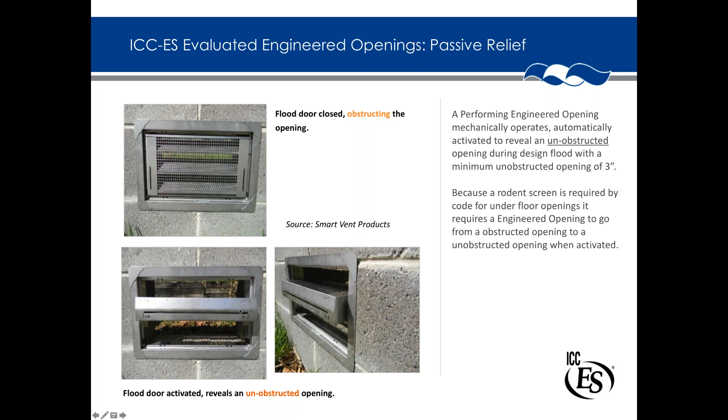Floods in Peoria, Illinois, this is just recently. Here the vents are in the open position, allowing that debris to flow through. These were activated from the inside out. So when we're talking about automatic entry and exit, when you have directional flow flowing from east to west or north to south, you're going to place your flood vents according to that potential flow. Sometimes your north-facing wall will experience that floodwater first and then would need to activate the south-facing vents next. So they have to work in both directions, as I stated before.

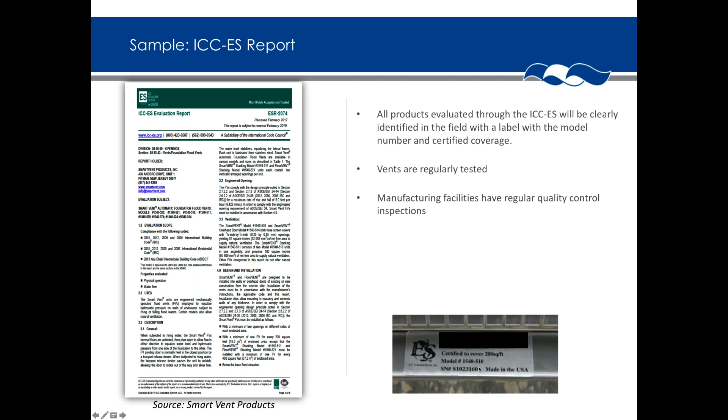And just to wrap up, placement requirements, whether you're looking at the I codes, the ASCE requirements, or any of the FEMA NFIP regs, flood vents need to be on 2 different walls for whatever enclosed area is below the BFE.

You can go to FEMA Technical Bulletin 1 for a whole list of all the different types of enclosed spaces that would require flood openings. But I get a question a lot: hey, a 10 by 10 enclosed space is 100 square foot, if I'm using a device that covers 200 square foot, do I just use one? The answer is no, you still need a minimum of 2 openings, and they need to be placed on 2 different walls to allow the flow in and flow out.

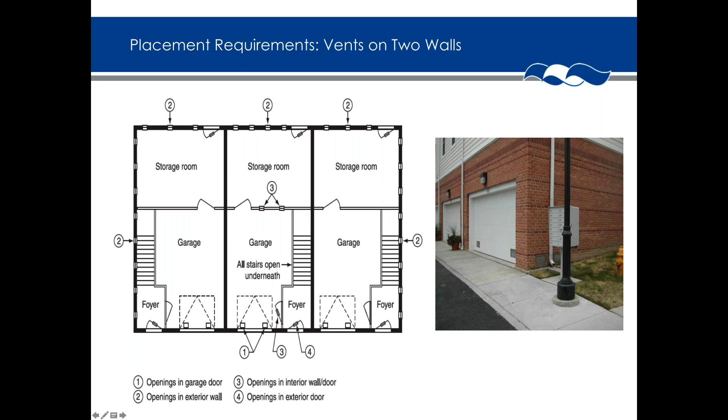When you have a middle unit in a townhouse, you oftentimes have dividing walls separating, meeting the 2 different wall requirements. So we would put flow-through openings in this dividing wall to join the spaces up. Make sure if that's a fire-rated wall, you're using a product that has a fire rating kit associated with it.

The other placement requirement, which you can find on page 2 of FEMA TB1, is to have your flood vents within 12 inches, no more than 1 foot or 12 inches above the highest adjacent grade directly below that opening. So it's measured from the interior or exterior, whatever's the highest between those two. The vent needs to be within 12 inches.

And here you can see a block foundation. It applies to CMU, it applies to poured concrete wall or concrete foundations, it applies to framed walls.

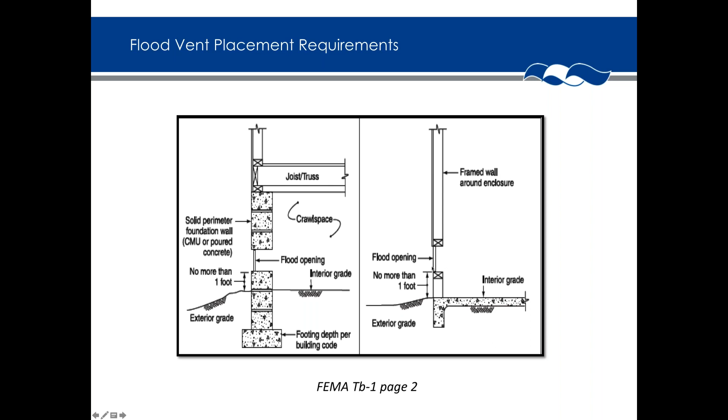We're seeing a lot of this now with the new ASCE 24 requirements that are also in the I codes, that breakaway walls, regardless of flood zone, A zone and V zone, in breakaway walls, you now are required to have proper flood vents in those walls. So you're seeing a lot more framed wall installations for flood openings, but the rules still apply within 12 inches.

Great case study on this one. Rob Wagner saved 75% on his flood insurance with this retrofit, which was a house that was elevated post-firm, but they forgot to put in proper flood vents, right? Great story there. Send me a note after this webinar if you'd like to hear more about that story.

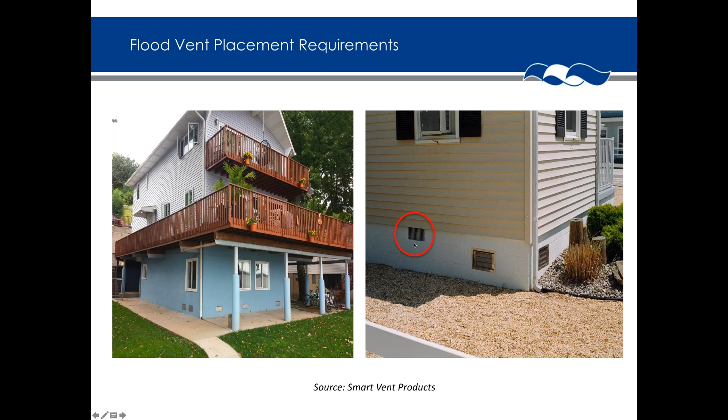And then just to summarize at the end, this vent wouldn't be compliant because it's more than 1 foot above the highest adjacent grade directly below the opening. And this particular device was not broken in the open position. If you're using a non-engineered opening, any closing device has to be broken off to make sure that it's going to allow for the entry or exit of flood waters.

But mind you, that's a screened opening, so you're measuring only the net open area. So you'd have a lot more of those vents if you did not have mechanically operated engineered flood vents, as you see over here.